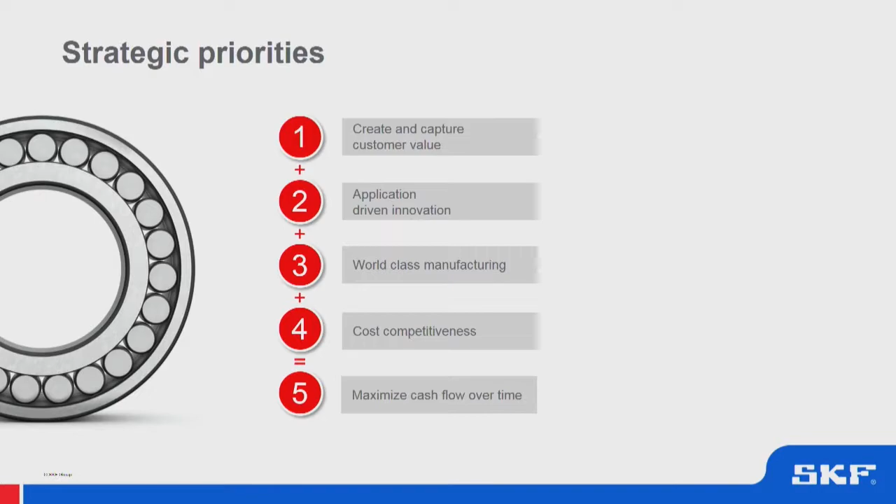Then it's very important that all the developments we do are application driven. We clearly see in the market a demand for value driven innovation, not always doing the next step in performance as such, but making sure you address the specific needs of a customer. And I will also give you an example with that. I can even tell you what the link will be towards digitalization.

Of course, world-class manufacturing. A bearing is a very standardized product these days. You can actually find the ISO rules around how bearings are basically defined. So you need to be absolutely strong and world-class in manufacturing to make sure you make these components in the right way and to be competitive in the market. And that goes, of course, also for being cost competitive, making sure we provide value in the most efficient way, eventually maximizing the cash flow over time.

What I will try to tell you today, and make a link with, is how digitalization fits with these four and five priorities that I've been displaying here, and how digitalization is currently still changing SKF as a company in everything that we do.

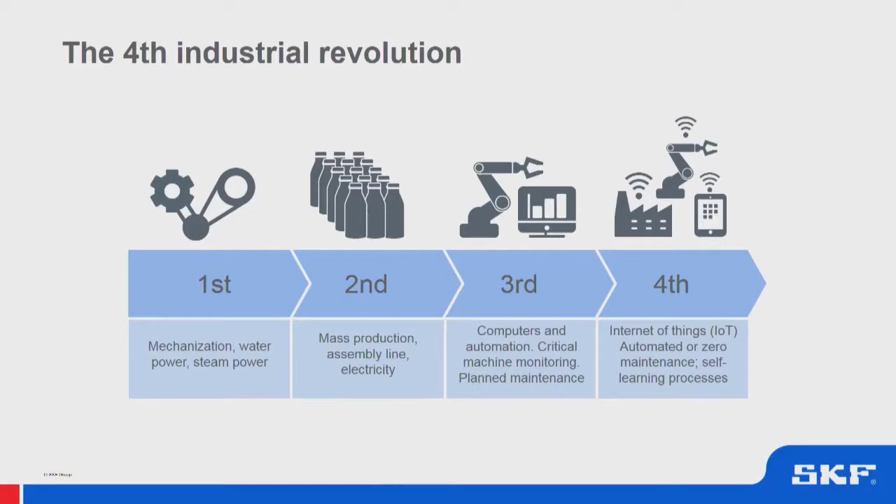You're probably aware that the Internet of Things, or the Industry 4.0 revolution as some people call it, is really the fourth in a row. We started with mechanization, water and power and steam, going on to enable mass production, setting up assembly lines and using electricity to speed up output. Then, of course, we had automation in the third revolution, where computers and automation kicked in. The first machine monitoring was born, and planned maintenance started to play an important role. Instead of fixing something when it was broken, we saw the benefits of starting to plan maintenance and take care of the reliability of rotating equipment.

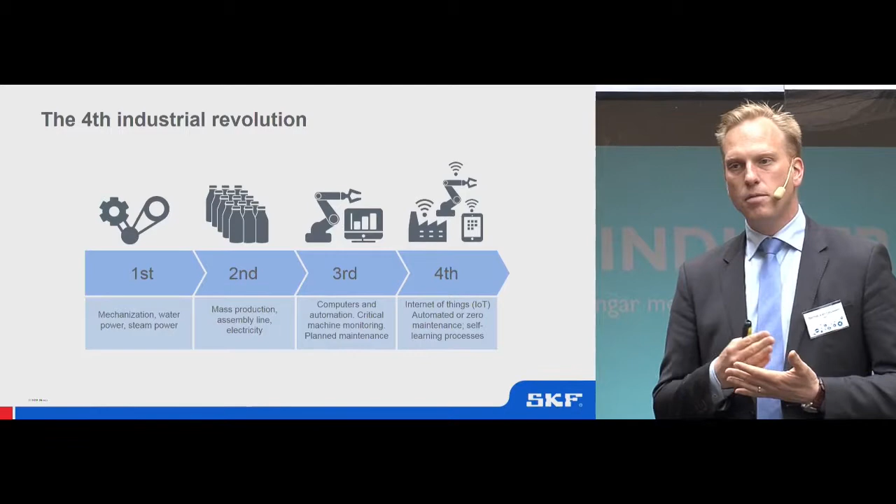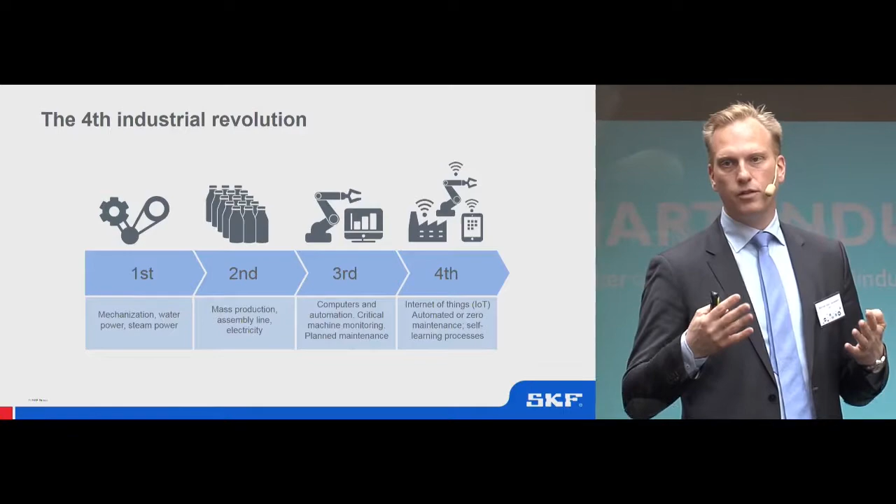And now, for sure, with the Internet of Things, where basically everything gets connected, it gets much, much easier to get much more data and find many more correlations that would even much earlier tell you when you would run the risk of losing the reliability of your machine.

But it's not only digitalization. I believe that digitalization is a trigger for a lot of industrial changes actually going on. And I'll give you some examples.

You may understand that as SKF, we're supplying original equipment manufacturers, but for sure also end users, and we see basically changes all over there. So if we look at our business with OEMs that have a clear service strategy, there's a clear differentiation in performance. It's not only a matter of providing the best performing product and trying to innovate on that field.

No, there's also a clear shift towards what we would call value offering. Is this product exactly suitable for the purpose that I have as a customer in this field? Which, for a bearing, is a very difficult thing to do. You might think that after 100 years, the only thing you could still do to a bearing is improve its performance, increase the steel quality, increase the life.

But that is not always required to actually meet the requirements of the application. Then, of course, we see that there's a lot of disruption in the distribution, especially as a channel for going to market. You see the growing power of an Amazon. You can imagine that as a company where we are very reliant on our distributors to take care of those 17,000 locations, it's very disruptive that one day we have to think about Amazon being one of those distributors as well, with a huge global reach.

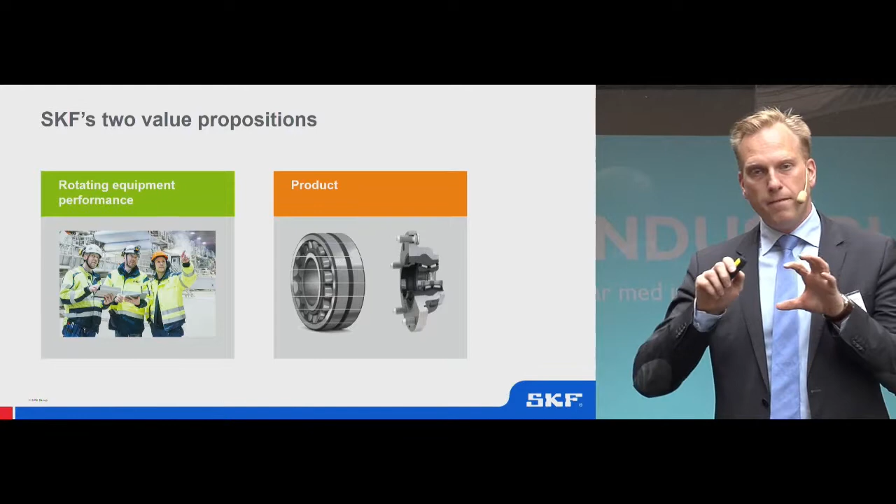So what are the two value propositions that we put into the market as SKF? Well, many of you probably know SKF from our products, but we also put these products into the market in what we call a rotating equipment performance offer.

And this is where we take much more responsibility almost for the reliability of a rotating machine. Again, all that knowledge that we have over the past 100 years on how machines perform, why machines fail, how you can make design improvements - this you cannot always capture only in a product offering. This is what we're also trying to capture in our rotating equipment performance offer, and I will try to explain a bit better what that actually means.

So let's focus on the product first, and especially how digitalization actually affects the way that we put the product into the market, how we put this value offering into the market. A product offering these days means that you need to be able to supply the right product for the right cost at the right time.

So that goes already far beyond the product design as such. You need to make sure that the product gets there in time, and you need to make sure that you have optimized your product for the application requirements, looking also from a cost perspective. And again, a bearing being a standard component, it's not only a matter of continuously improving the performance - this is basically what you see depicted here, and I'll show you some other examples later on.

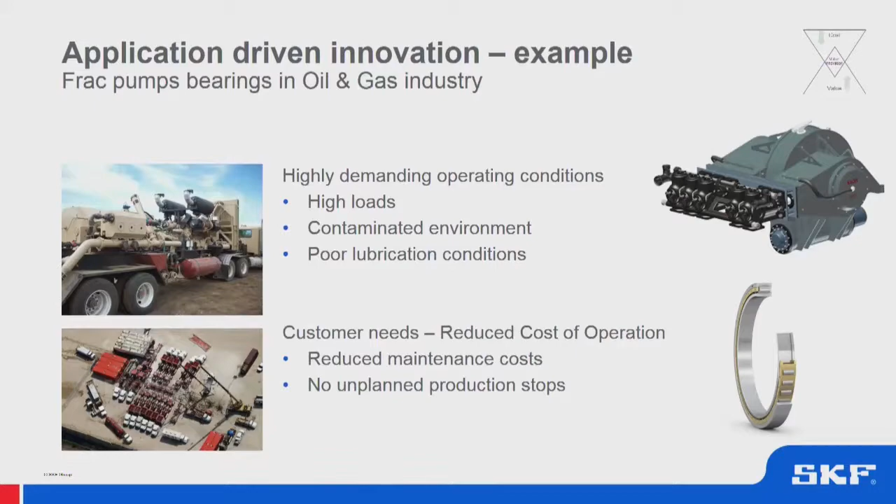Just to give you another example where reliability of the product is absolutely key, we're talking about frac pumps. Frac pumps have to work. You cannot allow for the frac pump not to work, because the time that the pump is not working and the standstill that it creates basically means you have a loss of money because of loss of production.

What we've done is very carefully look at what exactly the requirements are for this application. For example, if there is a specific planned maintenance interval of, let's say, every 6 months, then why would we strive for a product that lasts maybe 6 years? This opens up an opportunity to think of some performance elements in the product that you could maybe take away to reduce cost, and focus that on other performance criteria in order to make a very specific design for these type of applications.

Now, why is that connected to digitalization, you may ask? Well, the reason is if you start to turn a standard product into something very much dedicated to a specific application, then of course the volume will by default be much smaller. And then basically all the effort you may have taken to take cost out might be lost.

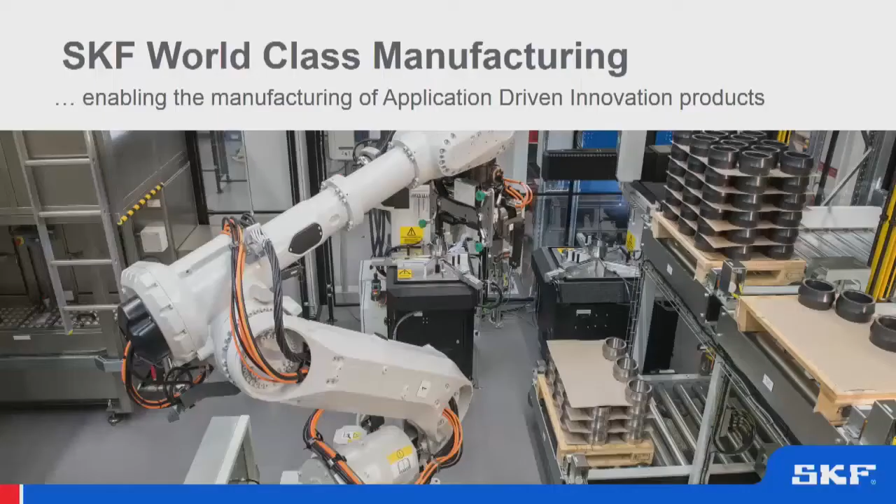In our more traditional manufacturing, that would for sure hold. But if we look at the completely new manufacturing - and this is really a state-of-the-art manufacturing site here in Gothenburg, which we inaugurated in April this year, where basically everything is fully optimized, everything is robotized - the most important thing is that it actually takes out the resetting time. Now all of a sudden it becomes interesting, because if I have basically zero resetting time, then this equation of the volume I manufacture versus the cost gets a major shift.

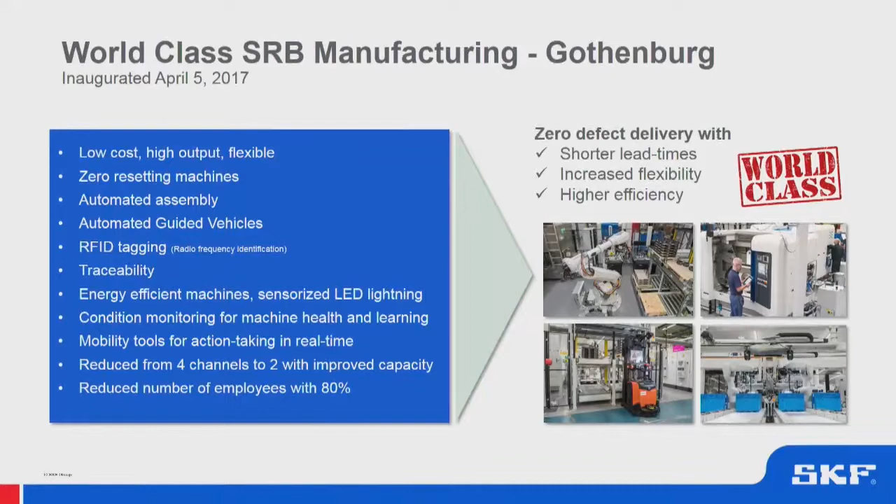To give you another example, more for the future - if we see at a customer application that there might actually be a bearing failure coming up, you could connect that to this manufacturing site, and basically the bearing will reorder itself. The robot will start manufacturing as soon as it gets a signal that the bearing is actually failing. That sounds a little futuristic, but you can imagine that digitalization and the integration of ERP systems, operating data, and maintenance data would eventually enable this.

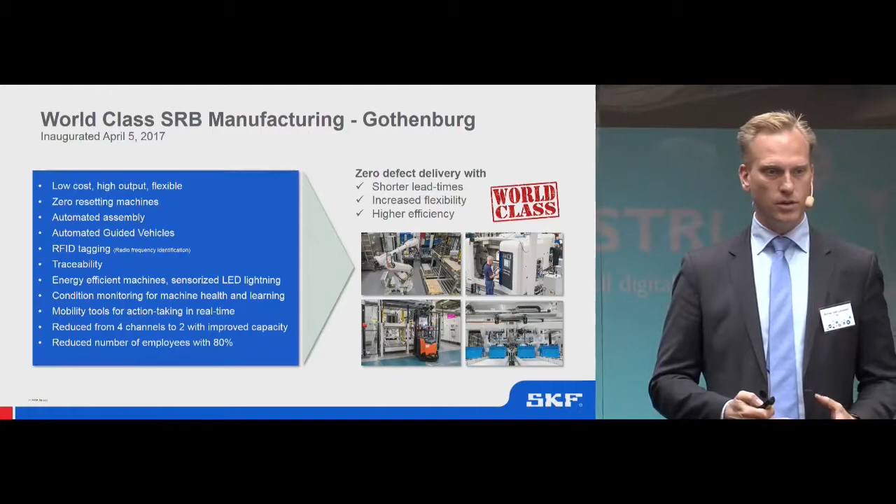You can take out a lot of trigger points which are currently leading to a lot of stock. The end user has stock because something might break down. Then we have a distributor that also keeps products in stock. Then SKF has a huge warehouse keeping parts in stock. Why do we keep that all in stock? Because we don't know when something is going to fail, because we are not combining the data that would allow us to take this stock out and manufacture whenever it is really needed. So the opportunity is really big.

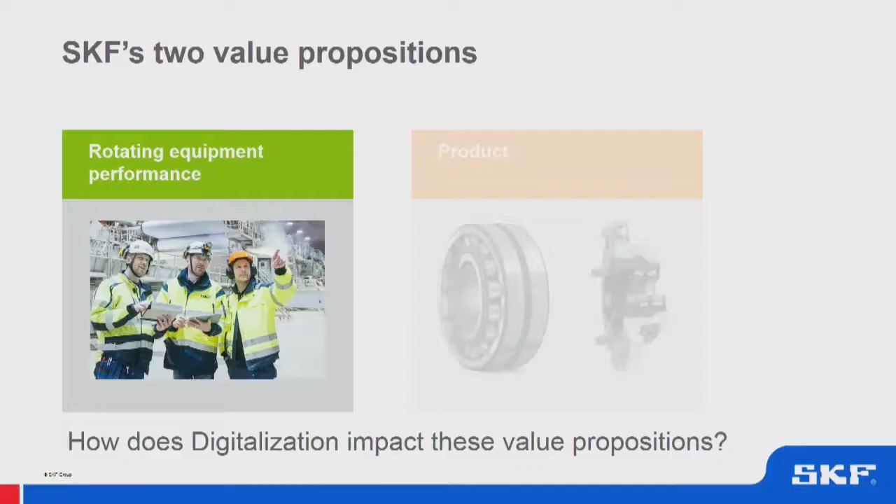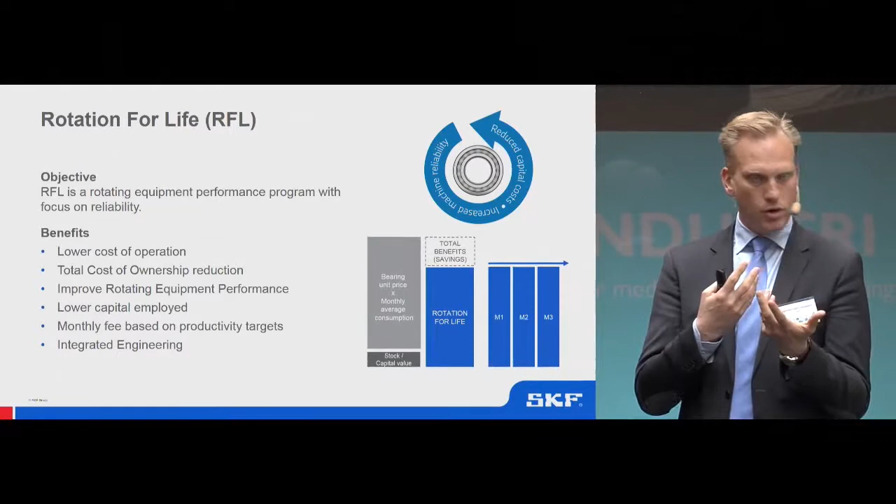If I go back to the two value propositions and focus on rotating equipment performance, I think it's much more clear what we should be doing there in terms of digitalization. This value proposition goes basically beyond the transactional selling of bearings and bearing-related products. This is really about us selling the bearing function more than actually the bearing as a product.

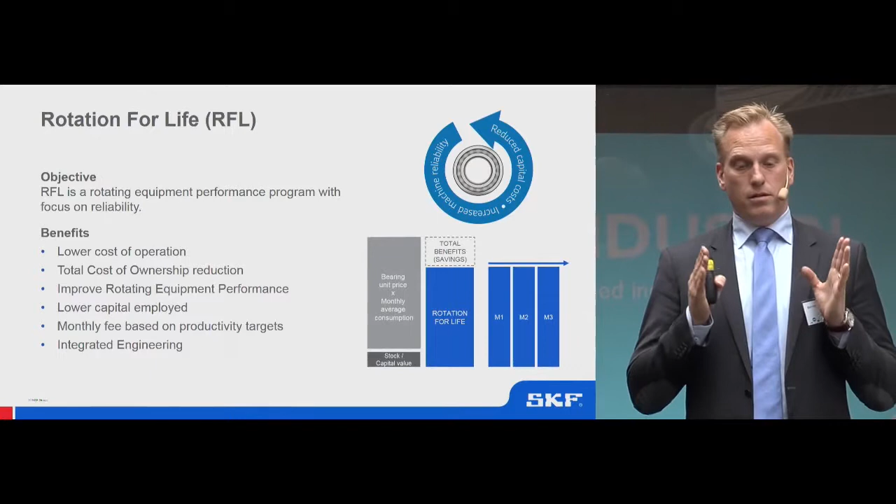So instead of waiting for a customer to place an order to replace bearings, or placing an order because he's developed a new machine, which leads to peaks in the ordering, in stock levels, also in the expenditures that customers actually have, we basically make an agreement on the performance that our products are actually given.

So instead of our innovation being a way to improve the performance of a specific product, now our innovation is steered by customer needs in terms of reliability, output of their machine, reduction of maintenance cost. And then you really have application-driven innovation. We call this concept rotation for life. It's built on a performance-based type of agreement that we will then have with end users.

And you can imagine that this also comes with a lot of additional risk. If you sell a product that sits in a box, the moment you sell it, you're basically stepping away from the risk. For sure you have guarantees, you have warranties, but that's as far as your business risk goes. If you're now saying, I'm selling you a function which I ensure will lead to a certain manufacturing output, then the business model has completely changed.

And then we're not even talking about the purchasing price of bearings anymore. We basically, based on the performance that we have achieved, will be paid for the performance that we have actually delivered. And there, of course, in order for us to reduce that risk, we need to heavily rely on the data we're actually gathering. We need to look for correlations in order to reduce that risk, in order to understand why a machine is actually failing.

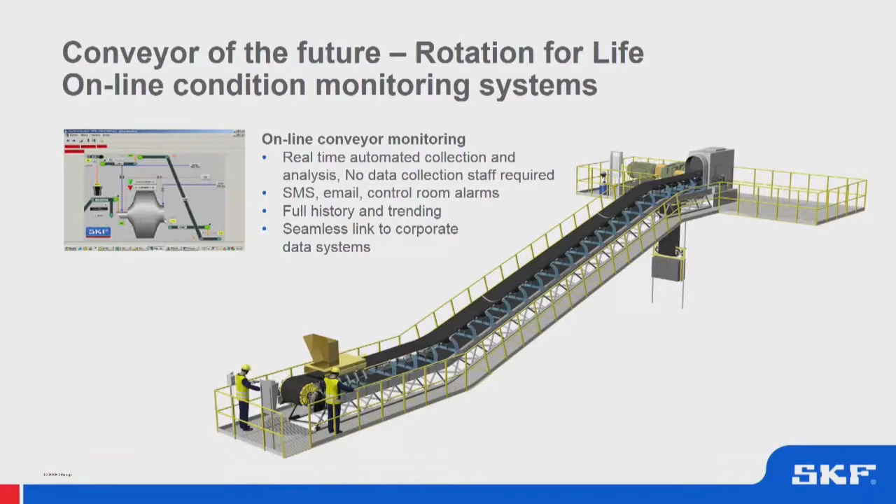Now what we have done here is that instead of continuously coming in and selling products once maintenance needs to take place, we have taken full responsibility for the functionality, availability, and reliability of this conveyor belt at one of our customers.

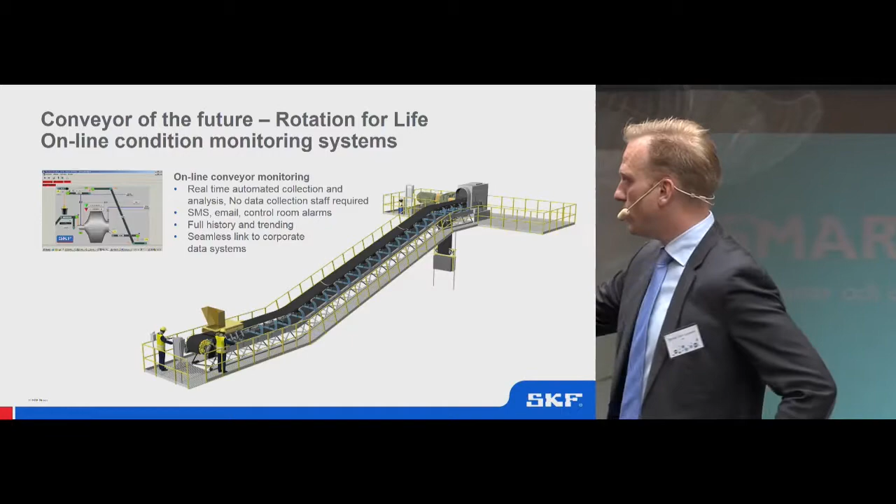So we have equipped it with real-time automated collection and analysis. We have automated it so far that basically there's no staff involved in order to actually get the data in. We're using full history and trending, which we can also use, for example, to make design improvements.

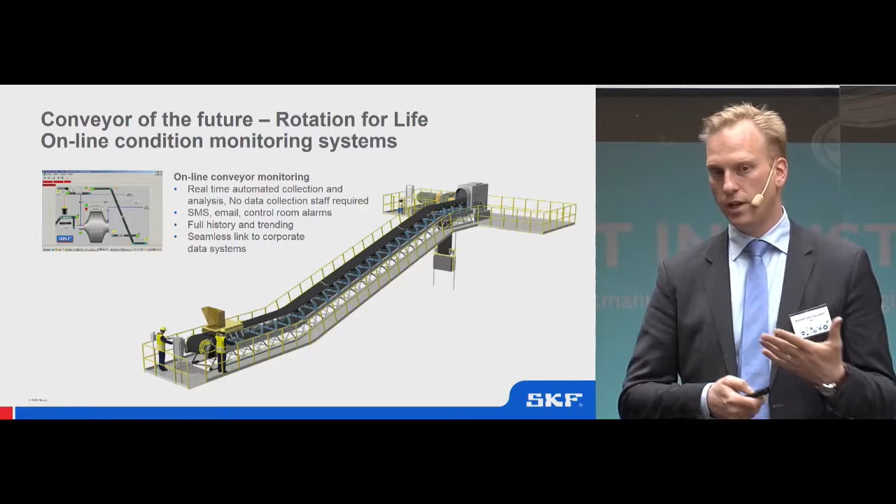And of course we make a link to all kinds of corporate data systems. Because now that you're equipping this conveyor belt with a lot of sensors, it's not only for the maintenance. You can also see how many kilograms of goods have I actually moved, how has that impacted reliability, and what was the relationship towards the overall output of that factory or site?

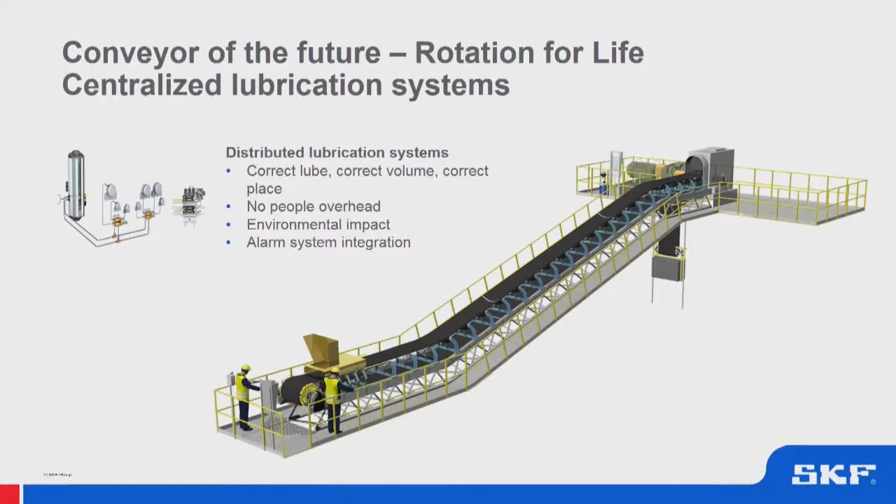But there's another thing, and this is what I meant with application-driven innovation. We also saw that the lubrication of this conveyor belt was actually done manually, which first of all is also a reliability risk, because how do you control how much lubricant was added by an operator? And should these lubrication conditions not be dependent on, for example, the loading condition, on how often the machine was actually used? So it became in our interest, in order to ensure and take away the risk and increase reliability, to install an optimized lubrication system in this system.

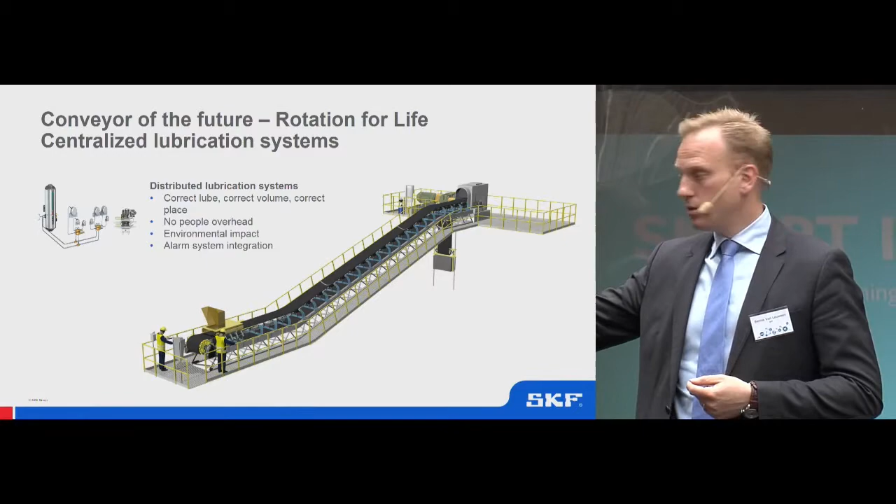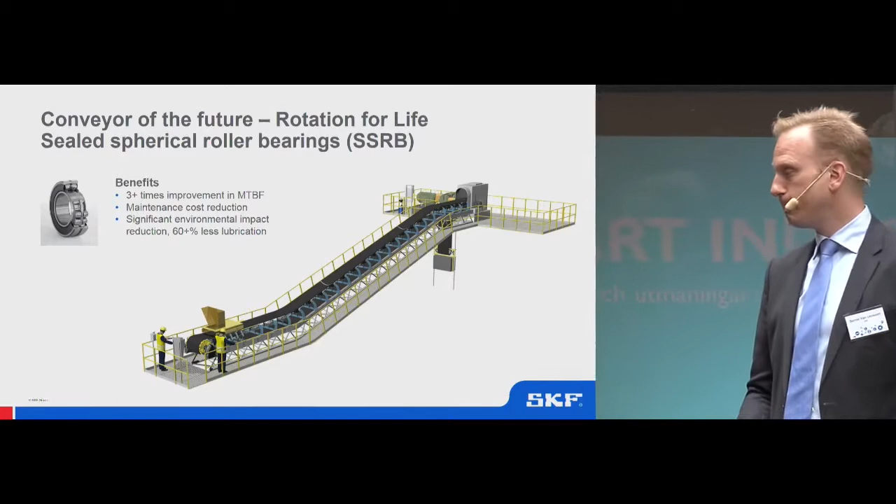Thereby, eventually, of course, also reducing the overall operational cost for the customer. And this is, I would say, the clearest example of how it has led to also product innovation: we learned that contamination was an important issue in the reliability of this type of machine. So we started to develop a spherical roller bearing, which is here, that is actually completely sealed, in order to again increase reliability based on the experience we started to gain from these types of applications and pieces of assets.

If we talk about industrial digitalization, then what is it that we actually refer to? I was trying to give you that in the previous example.

But in SKF we have a definition where we say it's important to collect the data. And let me be correct, because data is, of course, something else than information. Data is not difficult to get, but to actually turn data into information requires some intelligence. That data you first need to connect, and then there needs to be some kind of detection. A lot of systems are basically collecting data all day, but they're not always connecting it, they're not always throwing the data somewhere where it needs to be processed. That would basically be a waste of bandwidth and a waste of time on that end.

Then the second stage would basically be to analyze the data that has been collected, to diagnose, so to understand what it says about the condition of the equipment, and also about the severity of any faults I may have found. And if I know the potential fault and the severity, then I can also start making predictions.

I can use, I think today we will also have a speaker about artificial intelligence. Well, for sure, when we talk about prognostics, we're talking about statistical models, looking for correlations. So we will use historical data to find those correlations and make better and better prognoses on when we think the reliability of a machine will no longer meet the requirements, way before we have a full functional loss of that piece of equipment.

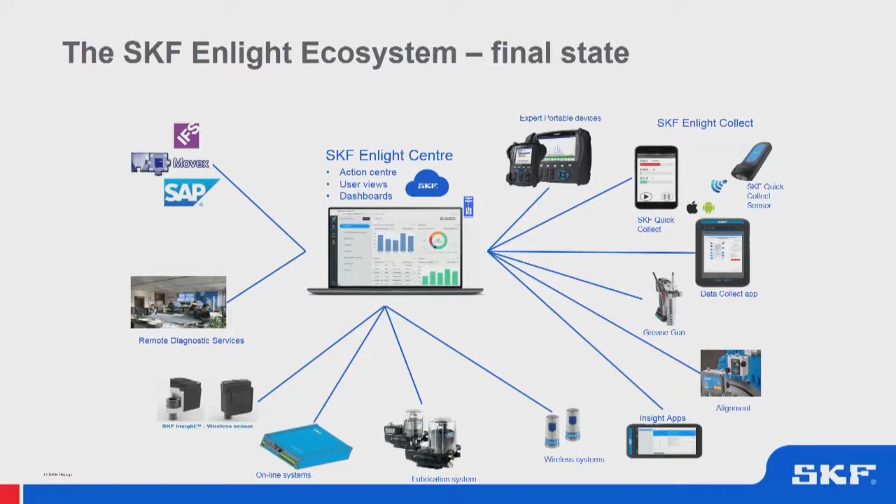So how do we envision this from a product perspective? As I said, we have at least 15 years of experience in SKF when it comes to condition monitoring. But the developments have been very much focused on experts who know how to turn data into information. That's great if you're monitoring 400 wind turbines somewhere, but if your ambition in 3 years' time is to do 4,000 wind turbines, should you hire 10 times more experts to go through those signals and read them out? No, you have to use different technologies to look into that.

It's also a way of visualizing. Why does the expert have to pick up the phone and tell the customer, listen, you have a problem in this machine, or you might have to plan for this, this, and this? By connecting the data directly to automated processing and diagnosis, we can directly display the reliability and, you could say, the risks that an end user or customer is running into.

And this is where we'll put the data together. It's a matter of looking at our existing systems, existing products, and how we actually bring them all together in what we call SKF Enlight Center. This will be a center in which operators and maintenance customers will be able to see the status of their machinery. And when you think about software development, you can imagine the customization of this interface is also extremely important.

Because if you're responsible as a fleet owner in marine for several ships, you probably want the data shown to you differently than if you're the reliability engineer doing the measurements. You're interested in which measurement points you need to take in your next round, whereas the fleet owner needs to optimize the planning of the ships. So the existing products we had did not allow for that type of flexibility. They weren't made for this new revolution in visualizing data and helping our customers make operational decisions.